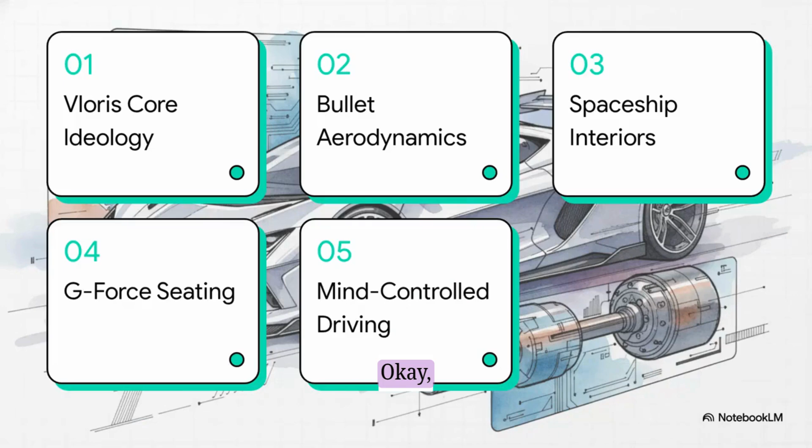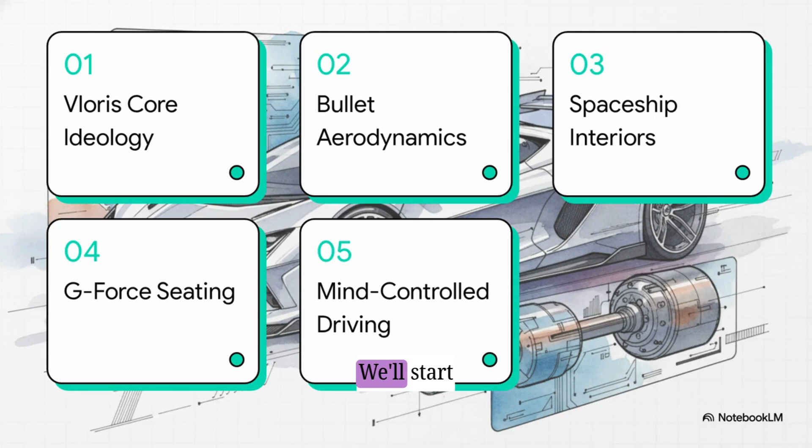Here's our syllabus for today's masterclass, mapping out this prototype from its foundational philosophy all the way to its most futuristic features. We'll start with the Vloris core ideology, then examine the exterior bullet-shaped aerodynamics. After that, we're stepping inside the futuristic spaceship interiors, feeling out the dynamic G-force seating, and finally, we'll wrap up by exploring the bleeding edge of human-machine fusion, mind-controlled driving.

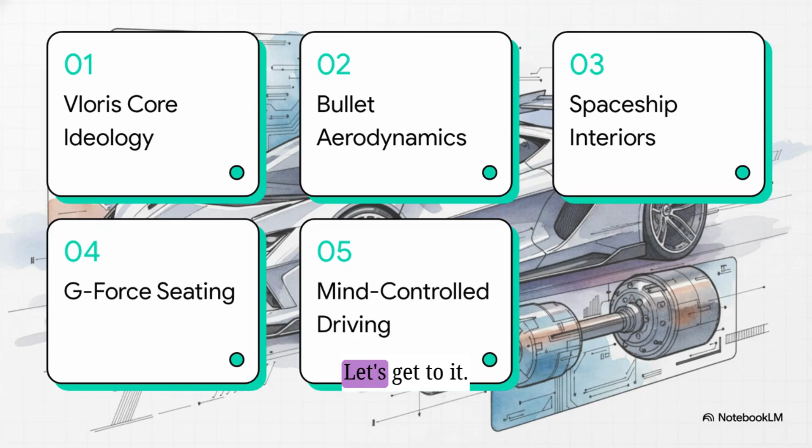Let's get to it. Section 1: The Vloris core ideology, the blueprint of Generation Z.

To really wrap our heads around Vloris Motors, you have to understand exactly the environment it was born in. This is a fully digital-first approach. We're not talking about old-school clay models or traditional drafting here. This hyper-realistic virtual space was built entirely from scratch using incredibly advanced digital tools, specifically Unreal Engine and Blender. Building, animating, and testing fluid aerodynamics within these high-end graphics engines allows for absolute clarity in visual design before a single physical part is ever manufactured. It's an absolute game changer.

But here is the most wild part about this whole endeavor. The visionary behind this digital-first powerhouse, Anish Ray, is literally only 15 years old. Yeah, you heard me right. We're looking at a teenager who is completely redefining the hypercar industry. Armed with dynamic rendering software and a relentless drive to build the best, he isn't waiting around for permission from legacy European automakers. He is straight up creating the future of mobility himself.

And the timeline of this project brilliantly illustrates the sheer speed of his innovation. At age 12, while most kids were stressing over homework, which Anish admits he occasionally skipped, he was already drafting raw sketches and ideating the Vloris concept. Fast forward to now, age 15, and he is presenting these highly complex, fully animated 3D models in Unreal Engine and Blender. Looking ahead to ages 18 to 20, his ultimate goal is to finalize what he considers the world's most futuristic motor. It's just a profound testament to the power of Generation Z's out-of-the-box, digitally native thinking.

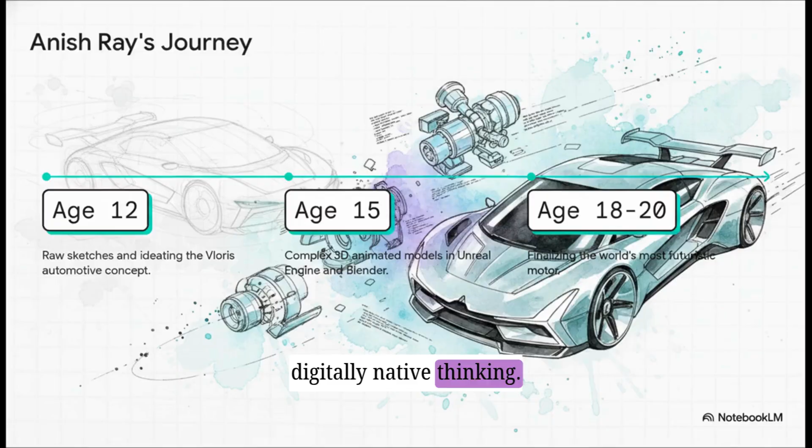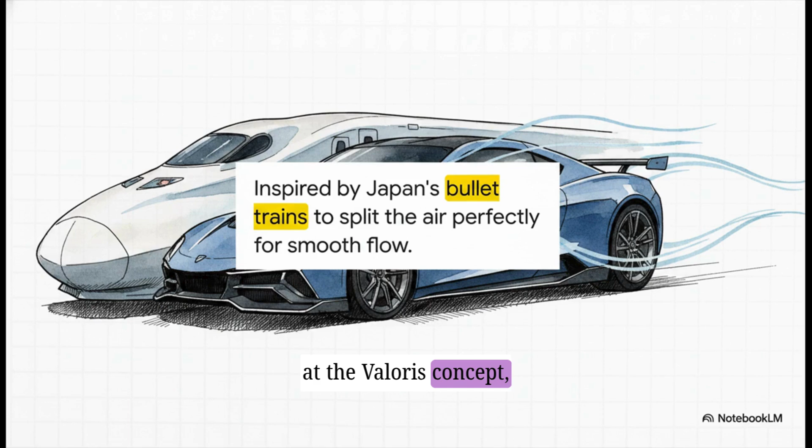Moving on to Section 2, Bullet-Shaped Aerodynamics, Pure Kinetic Efficiency. Let's transition from the software pipeline to the exterior physics. When you look at the Vloris concept, you'll notice it totally abandons those traditional random automotive shapes. It really doesn't look like anything else on the road, and there is a very deliberate engineering philosophy behind that choice.

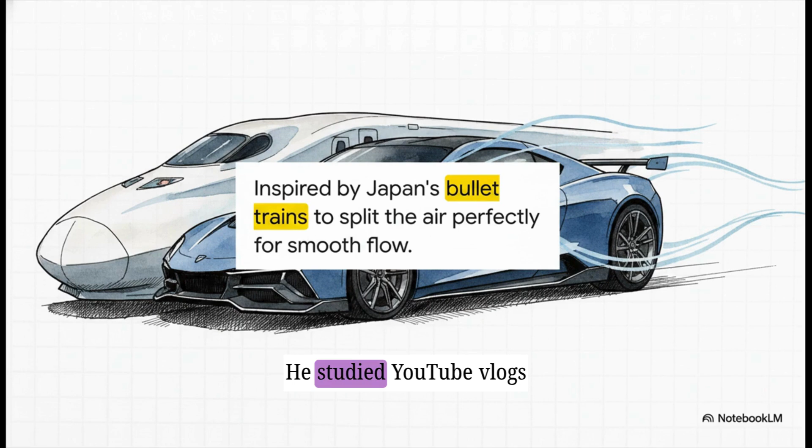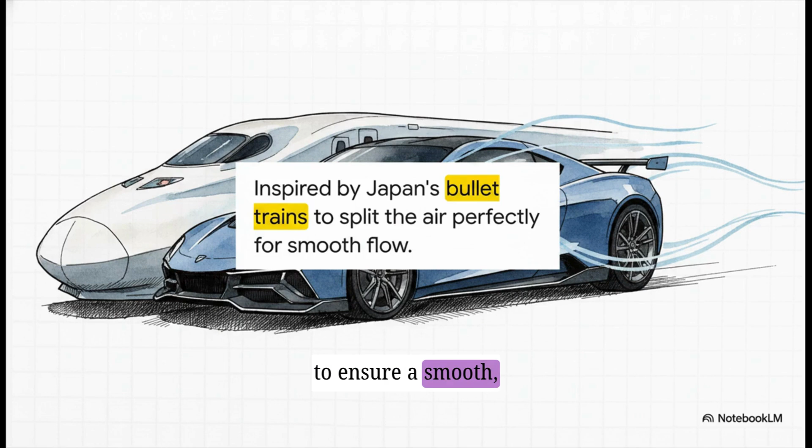Instead of copying legacy hypercars, Anish actually turned his attention to high-speed rail. He studied YouTube vlogs of Japan's Shinkansen bullet trains. Why? Well, he wanted to fully understand the precise logic of how those trains split the air perfectly into two pathways to ensure smooth, undisturbed flow. He realized that no existing hypercar utilizes a pure bullet shape, despite the massive aerodynamic advantages it offers for speed and stability. So the crucial takeaway here is that by adopting this bullet-shaped structure, the Vloris concept acts as a totally fresh take on physics. It achieves pure kinetic efficiency because it slices the air perfectly.

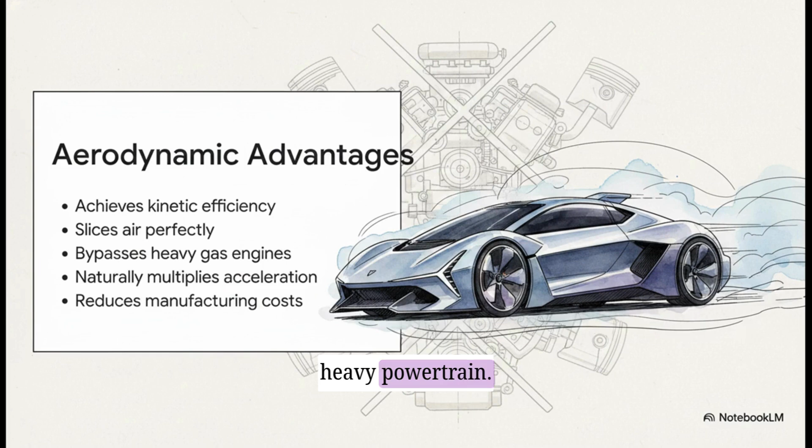And what does that mean in reality? It means you can completely bypass the need for massive, heavy, gas-guzzling engines. Because the shape of the car naturally multiplies your acceleration by minimizing drag, you just don't need to overcompensate with an excessively expensive, heavy powertrain. This doesn't just boost speed in a single moment, it significantly reduces engine manufacturing costs. It is a beautifully elegant digital solution to a heavy physical legacy problem.

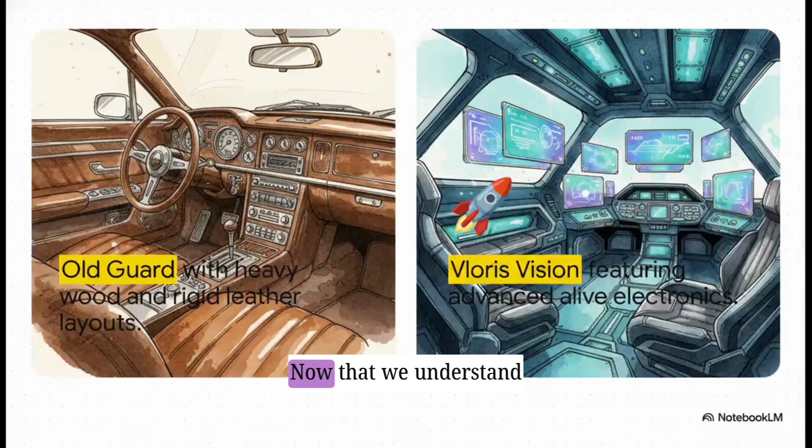Section 3: Futuristic Spaceship Interiors, Redefining the Hypercar Cabin. Now that we understand how the exterior cuts through the air, let's rethink the interior user experience. Because the inside of this vehicle is just as revolutionary as the outside. On one hand, you have the old guard. Think classic luxury brands like Rolls-Royce or Bentley. Their interiors often rely heavily on wooden furniture, rigid leather, and very static layouts. It's essentially a 19th century drawing room aesthetic.

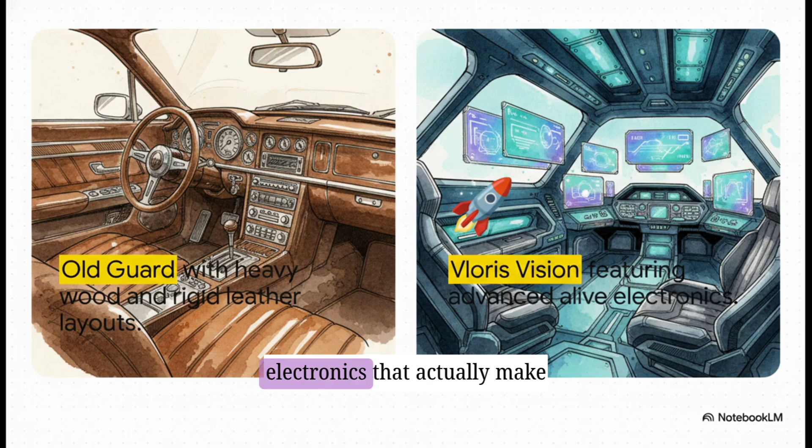But on the other hand, there's the Vloris vision. It is completely modern, embracing an ultra-realistic, vibrant spaceship aesthetic. Out with the heavy wood and in with advanced electronics that actually make the cabin feel alive, including exterior colors that can seamlessly morph right at the press of a smart key.

Getting a bit closer to the specific sci-fi features, Vloris includes these incredibly clever, easily attachable snap-on protective wheel shields to keep those high-end rims safe from debris.

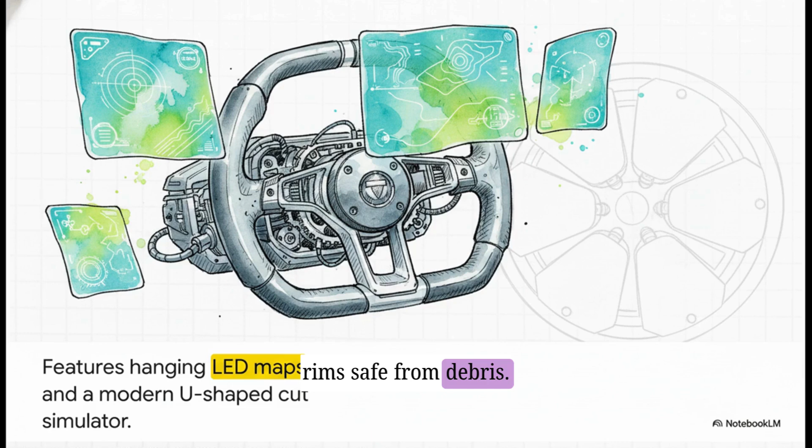Inside, that traditional circular steering wheel is entirely gone. It's replaced by a U-shaped cut simulator, breaking old-fashioned trends for a sleek, modern yoke style.

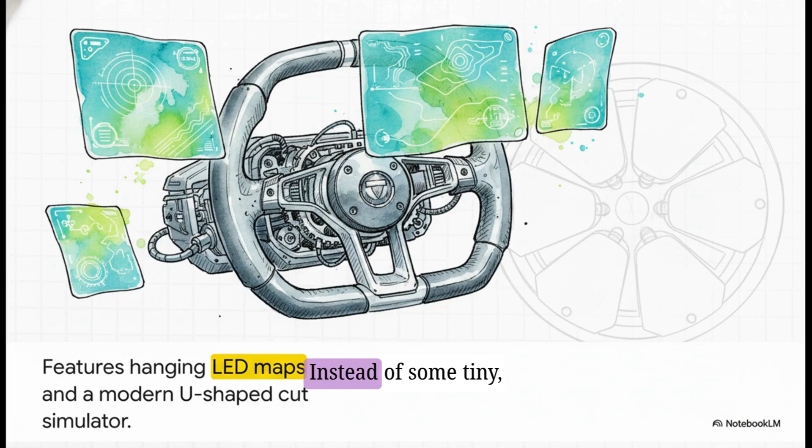But my absolute personal favorite feature has to be the hanging LED land map displays. Instead of some tiny static GPS screen stuck on a center console, Vloris literally surrounds you with dynamic radar and

map systems, elevating the passenger experience to what you'd expect on a private jet cruising at 40,000 feet. And you might be wondering, why pack so much immersive technology into the cabin? Well, think about this number, $15 million. Driving a hypercar isn't just about getting from point A to point B, it is an immensely valuable, multi-million-dollar experience.

The interior of the Vloris is meticulously designed, utilizing advanced cameras and fully interactive screens to ensure that every single second you spend inside matches that incredible experiential value.

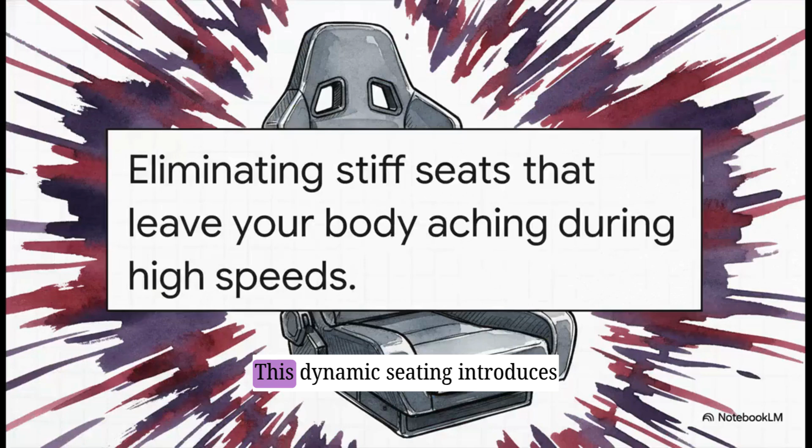Next up, Section 4, Dynamic G-Force Seating, responding to physical forces. This dynamic seating introduces the next level of progressive complexity. Let's see how this builds on the interior experience to address a major flaw in current high-performance vehicles.

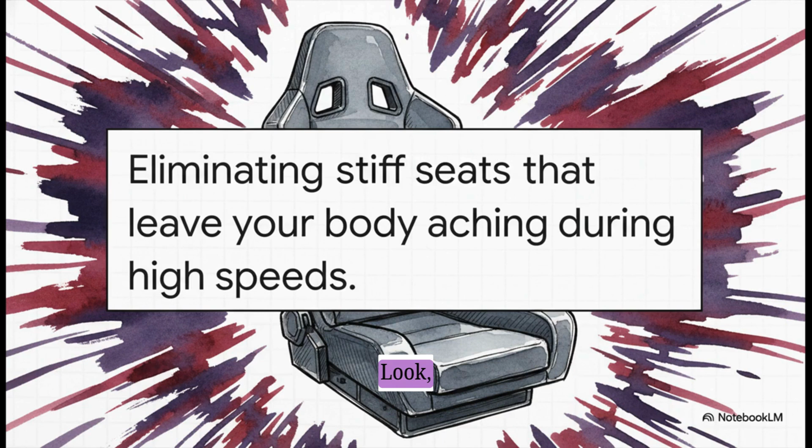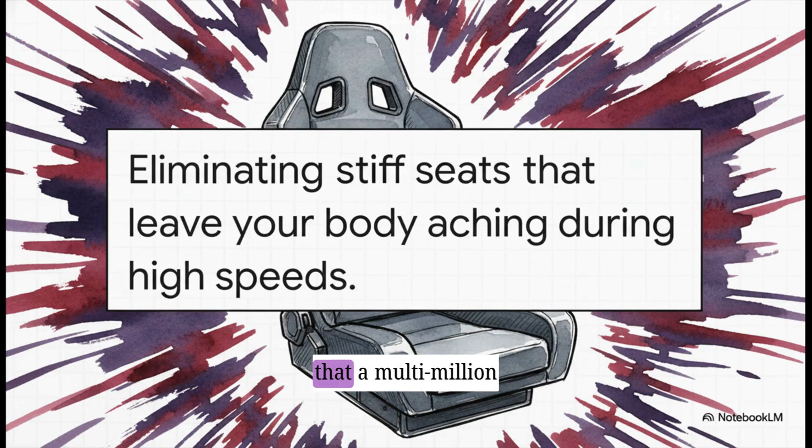Look, if you've ever taken a really sharp, high-speed turn, you know firsthand that stiff, plastic-like seats can leave your body totally aching. The driver is constantly fighting the physical forces of the car. The Vloris team recognized that a multi-million-dollar ride absolutely should not be physically punishing.

So, what's their solution? Taking direct inspiration from the artificial training simulators used by airplane pilots, Vloris integrates G-force swinging seats. As you navigate the road, these seats actually physically bank and tilt left or right. They respond dynamically to your acceleration, your braking, and your turns.

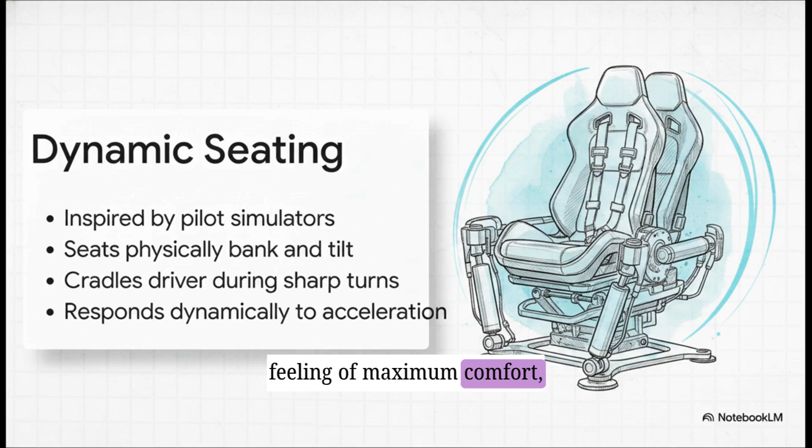By fluidly mimicking the exact driving angle, the seat cradles you perfectly, essentially neutralizing those heavy G-forces. It delivers an authentic, flight-like feeling of maximum comfort, even when you're traveling at completely unimaginable terrestrial speeds.

Finally, Section 5, Mind-Controlled Driving, the Ultimate Human-Machine Fusion. For our final section of this masterclass, we transition to the most complex, bleeding-edge concept of the Vloris architecture, operating a vehicle purely with human thought.

Brain-computer interface, or BCI, is a massively booming scientific field. Now, what's really interesting here is that this is not science fiction. Actually, scratch that. It sounds like sci-fi, but it is a highly funded, real-world discipline today.

Anish actually prioritized studying how brain frequencies are captured by a BCI over other advanced fields like quantum computing. The goal is to completely bridge the gap between human thought and mechanical action, rendering autopilot systems, steering wheels, and physical buttons entirely obsolete. Let's break this incredible concept down into a tangible, logical process to see how it actually works.

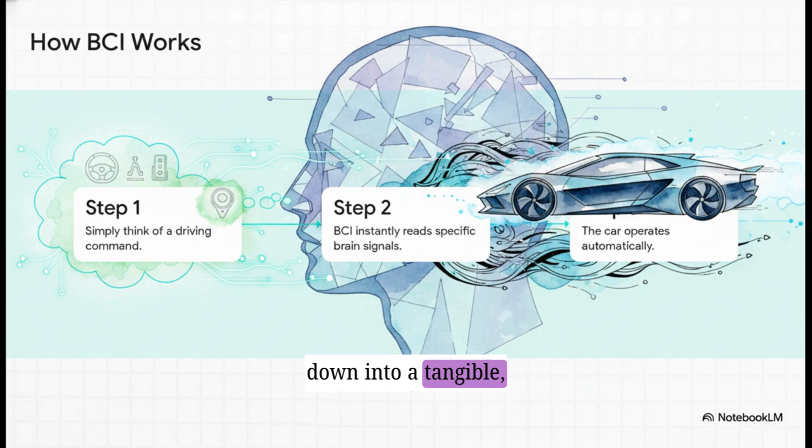Step 1. You simply think of a driving command: a turn, an acceleration, a stop. Step 2. The BCI instantly reads and recognizes those specific brain frequencies and signals. And Step 3. The car executes those fluid maneuvers automatically and instantaneously.

There's no reaching for a dial, no fighting a steering wheel. You access the vehicle purely through your mind.

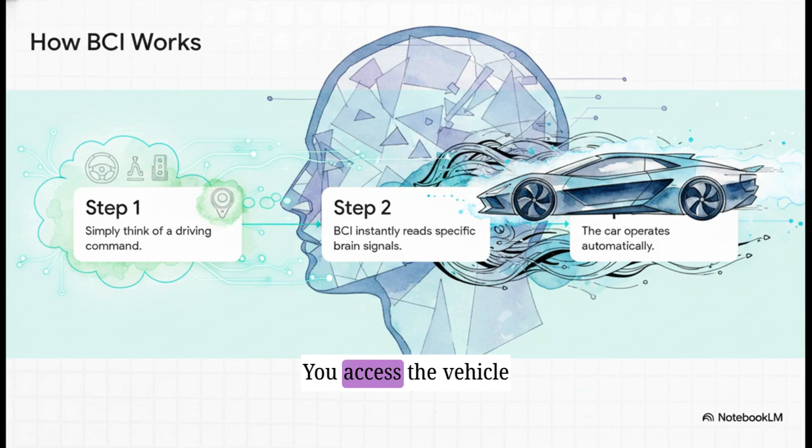It's absolutely wild. Ultimately, the endgame of Vloris Motors is that the vehicle becomes a direct, effortless extension of the human nervous system. It is the ultimate fusion of man and machine.

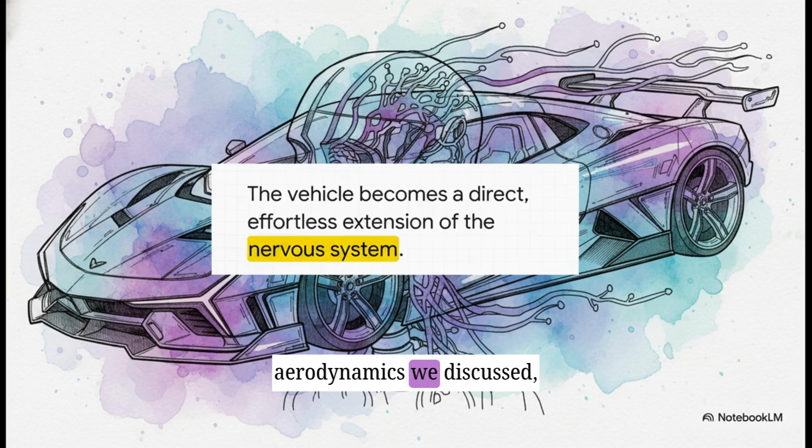By integrating BCI with that dynamic G-force seating and the bullet-shaped aerodynamics we discussed, the goal is to create the most futuristic, purely effortless luxury driving experience ever conceived.

So we've just deconstructed a true masterclass in hyper-realistic 3D visualization, kinetic aerodynamics, and brain-computer interfaces, all of it engineered by a 15-year-old visionary. And it leaves us with a truly provocative question.

Are legacy automakers genuinely prepared for a future driven purely by the minds and the sheer technological fluency of Generation Z? The old guard relies heavily on the past, but the future of luxury and speed might just be a